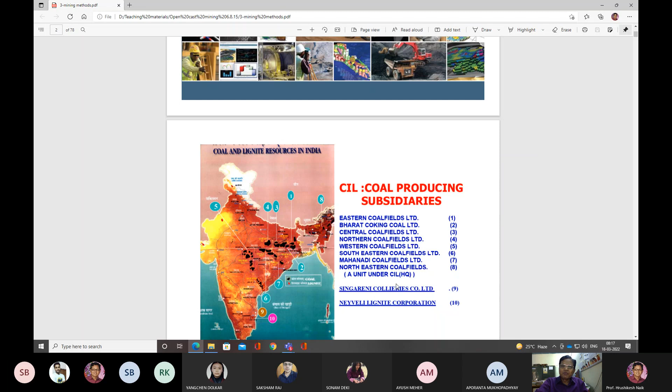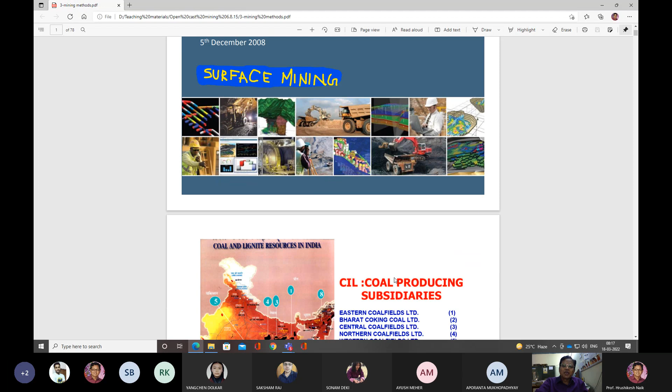In our country, the coal is mined by Coal India. Coal India is the company which is mining coal in India.

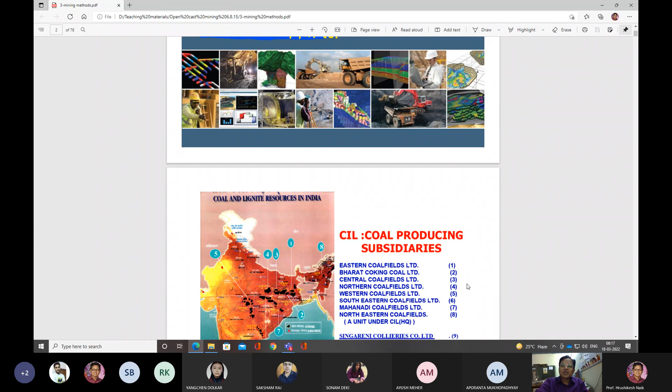The coal producing subsidiaries under Coal India include Eastern Coalfields Limited, Bharat Coking Coal Limited, Central Coalfields Limited, Northern Coalfields Limited, Western Coalfields Limited, South Eastern Coalfields Limited, Mahanadi Coalfields Limited, and Northeastern Coalfields Limited. All these subsidiaries are producing coal in India.

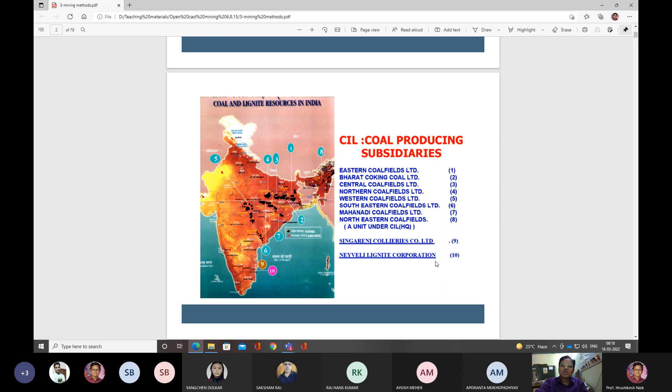Besides that, the Singareni Collieries Company Limited is also producing coal in India, and Neyveli Lignite Corporation is carrying out lignite mining in India.

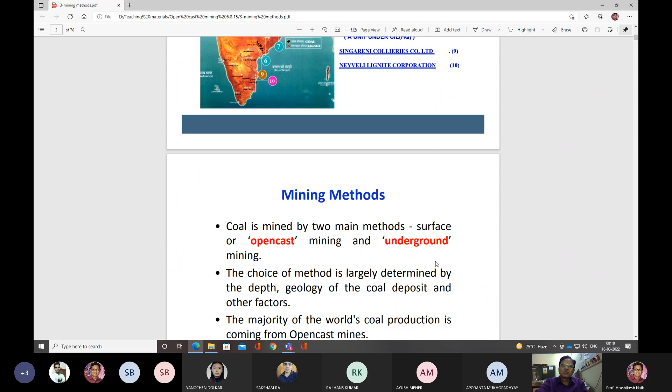The mining methods which are followed are open cast mining method and underground mining method. Coal is mined by these two main methods: surface mining or open cast mining, and underground coal mining. The choice of mining method is largely determined by the depth, geology of the coal deposit, and other factors.

The majority of the world's coal production is coming from open cast mines. This scenario is the same in India also.

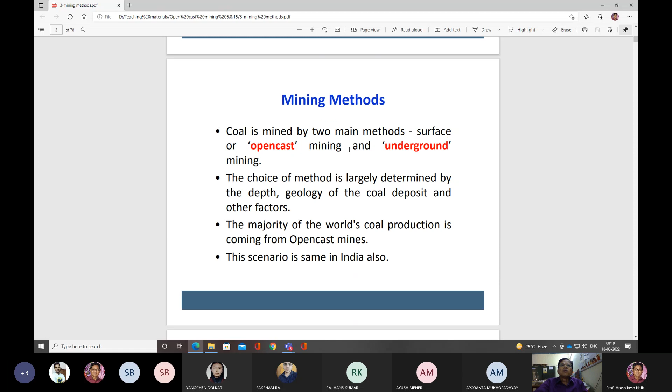We have discussed about the open cast mining methods, the different unit operations carried out in surface mines. The mining process in open cast mines is: first drill the holes, then blast the holes, then load the material, then haul the material, then transport it, and finally the mineral is processed, coal is washed.

Drilling is carried out by drill machines. There are two types of drill machines: rotary drilling and percussive drilling, and you can also go for a combination rotary-percussive drilling method.

Similarly, blasting is carried out using different types of explosives, like site mixed slurry explosives, emulsion explosives, primers, and non-electric detonators, all used for the blasting purpose.

After the material is blasted and fragmented, loading machines like shovels and draglines are used for loading the blasted material, and short distance hauling is done by front end loaders.

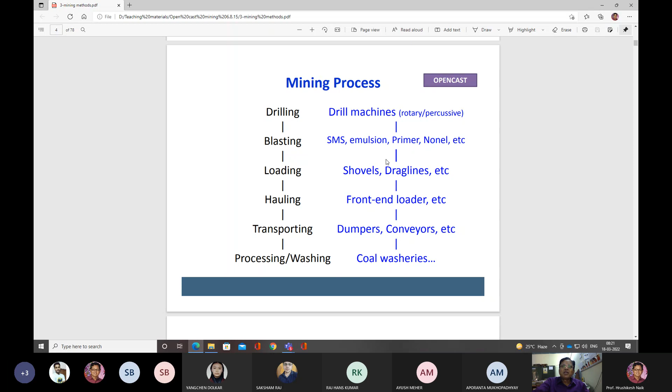Transportation of the material is carried out by dumpers and conveyors. After the material is transported, if it is waste material, it goes to the waste dump area. If it is coal, the material goes to the coal washeries for washing.

So the mining process we have discussed.

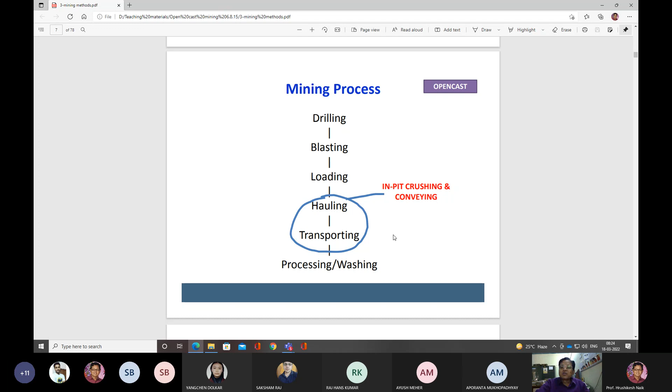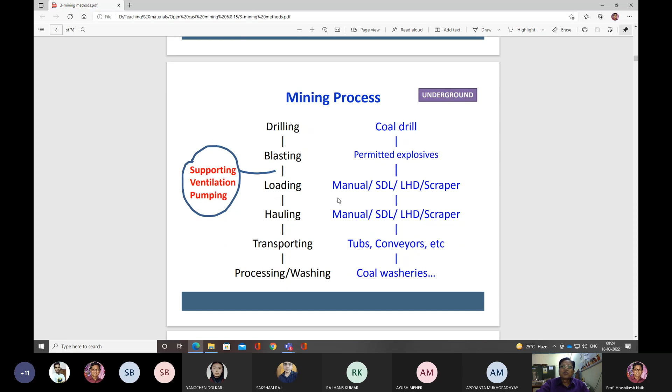For underground mining, these are the processes carried out, which is not our subject matter. So these are all underground mining processes, which we are not going to discuss.

In surface mines, selection of mining equipment is decided by the stripping ratio, the life of the mine, infrastructure available, proposed annual output, and technology available.

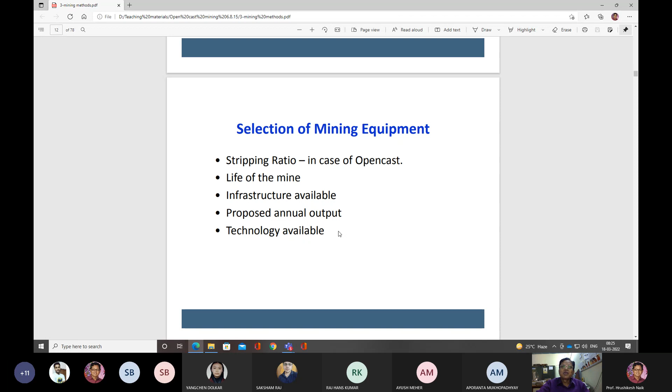In surface mining, the heavy earth moving equipments and machineries are selected based on the stripping ratio, life of the mine, infrastructure available, proposed annual output from the mine, and what type of technology is available in the market. Based on that, you have to select the mining equipment.

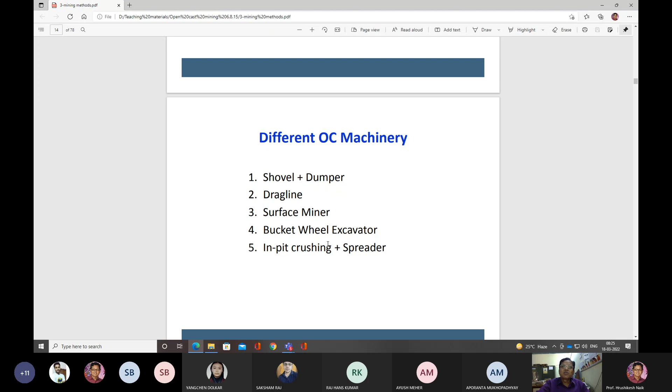The open cast mining machineries are shovel-dumper combination, dragline mining which we have discussed, surface miner which we have discussed, bucket wheel excavator which we have discussed, and in-pit crushing and spreader technology also which we have discussed.

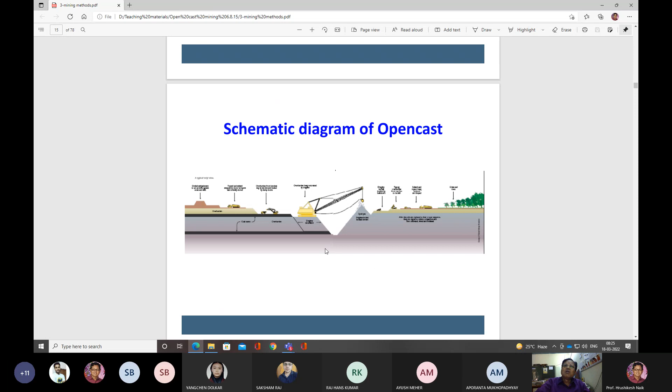This is the schematic diagram of open cast mining, showing how mining and reclamation are carried out simultaneously.

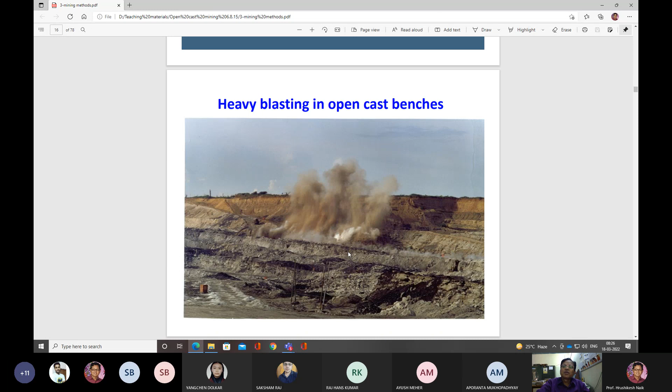This is a scenario of heavy blasting in open cast benches. Heavy blasting is carried out in open cast benches.

The shovel-dumper mining can be used for multi-seam extraction. It is a very flexible method of mining and can work in steep gradients up to 1 in 5.

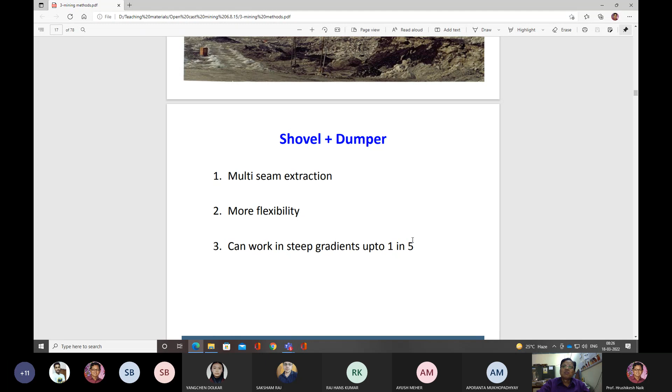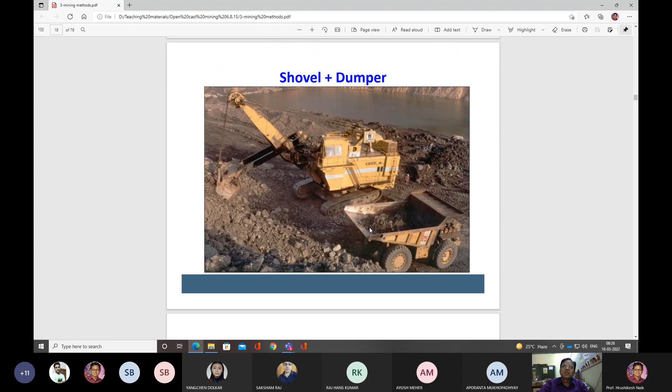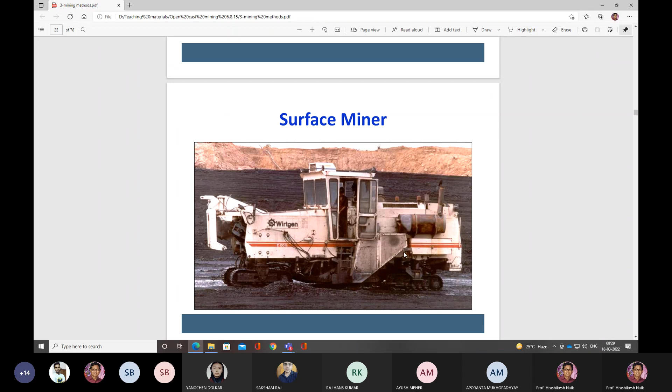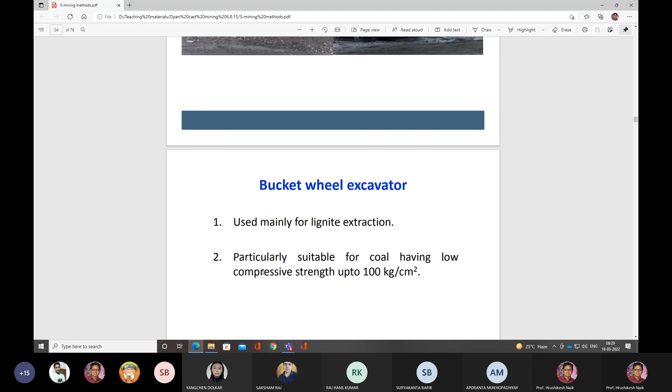For lignite extraction, the bucket wheel excavator is used. We have discussed the bucket wheel excavator in previous classes, which is used mainly for lignite extraction. This is the layout of the machine which is called the bucket wheel.

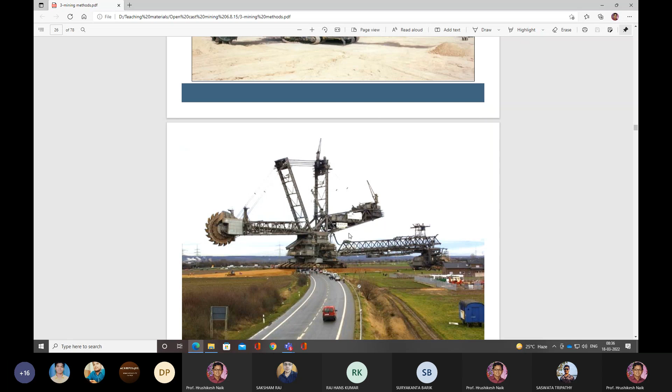So this is the bucket wheel excavator, and the wheel is very big. It has got these buckets - 1, 2, 3, up to 14 - so there are a number of buckets attached to the wheel. Whenever the wheel rotates anti-clockwise, the material is scooped and loaded onto the belt conveyor. This machine is called the bucket wheel excavator.

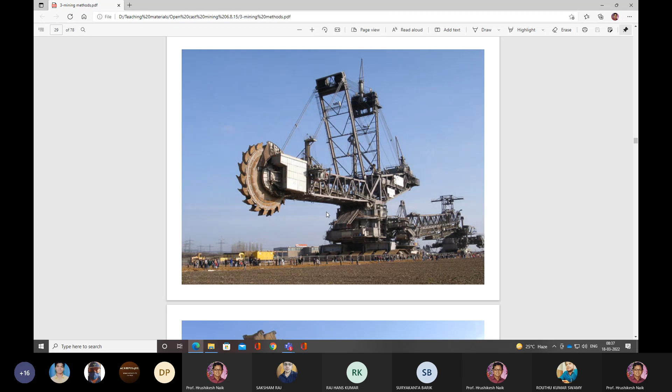So this is the diagram of the bucket wheel excavator. These are the buckets attached to the wheel, and this is the configuration of the bucket wheel excavator.

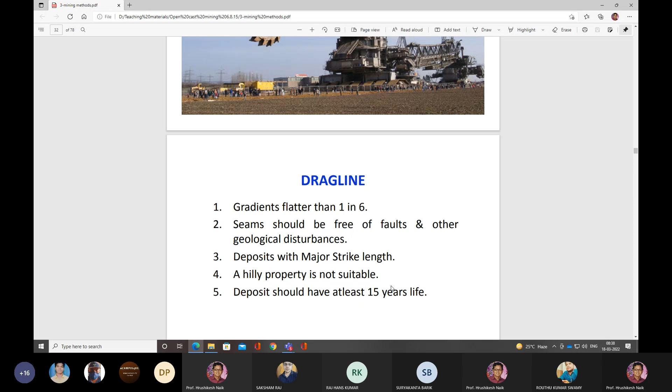Similarly, we have discussed dragline mining. Draglines can be used with gradients flatter than 1 in 6. Coal seams should be free from geological faults and other disturbances. The deposit should have major strike length, and a hilly property is not suitable for dragline mining. The mineral deposit should have at least 15 years of life, then only you can use the dragline machine.

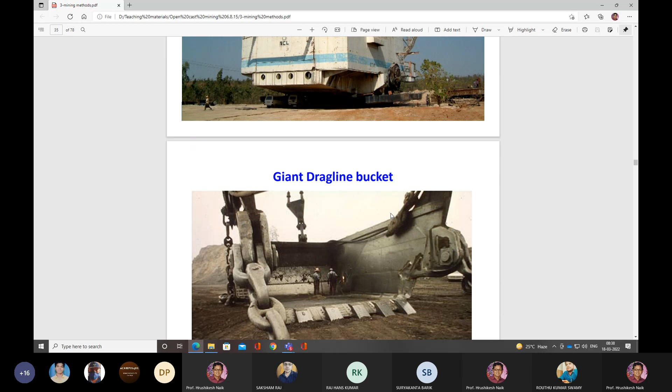So this is the configuration schematic diagram of the dragline machine. This is the bucket, and this is the dragline machine - the giant dragline bucket through which the material is lifted. This is a very big dragline bucket. We have also seen the in-pit crushing and conveying technology used in Neyveli Lignite Corporation.

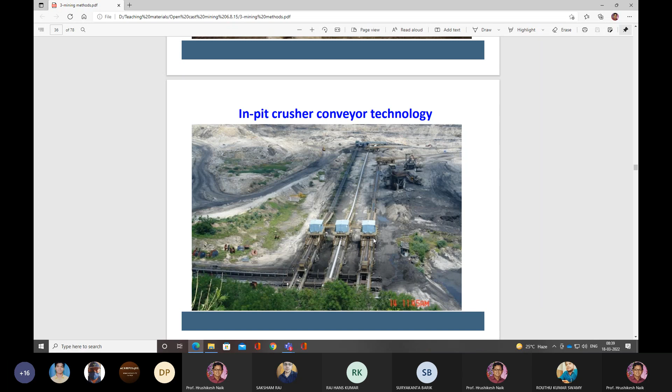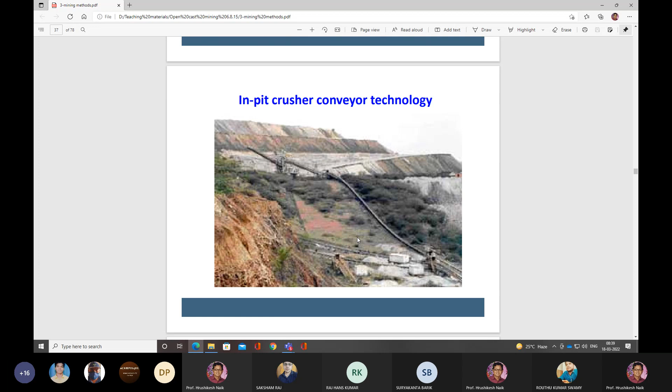So these are the crushers - one, two, three in-pit crushers are there. After the crushing of material is done, it is transported with the help of belt conveyors. This is how the in-pit crushing and conveying technology can be applied in mines.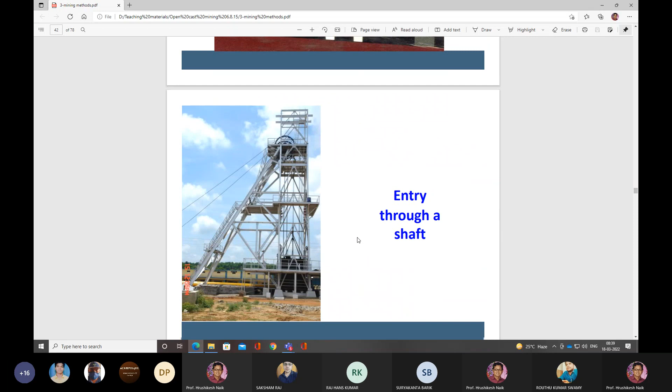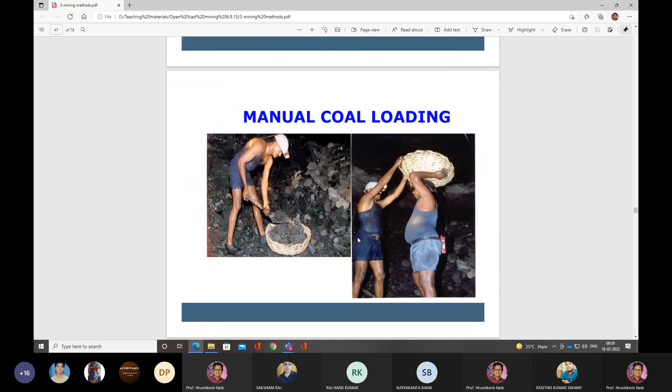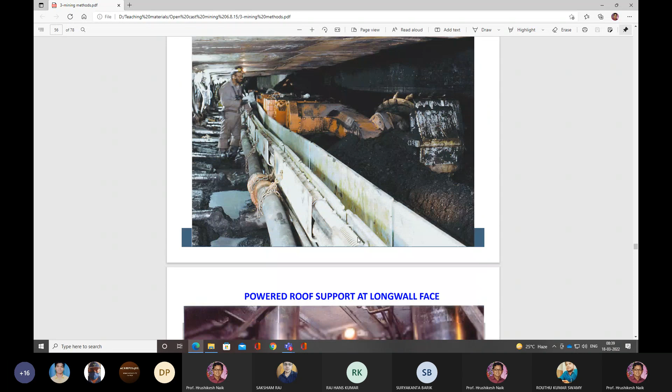This underground mining method I am not going to discuss, since this is a subject area you are already studying with another teacher. These are some features of underground mining which you can go through for your knowledge. Since this does not come under surface mining method, you can skip it and read it yourself.

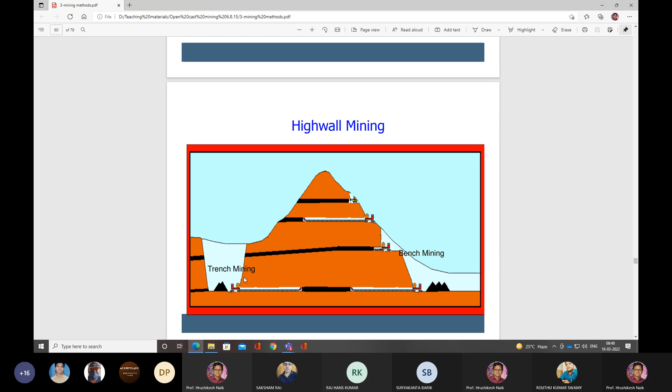Yesterday we discussed new concepts and new technologies in surface mining methods which are going to be implemented in India. Highwall mining is one method where you need not remove the overburden - you take out the coal by trench mining method. This is the high wall, these are the pillars you have left, and these are the boards from which the coal is taken out. It is called high wall mining because the wall is very high above the coal seam.

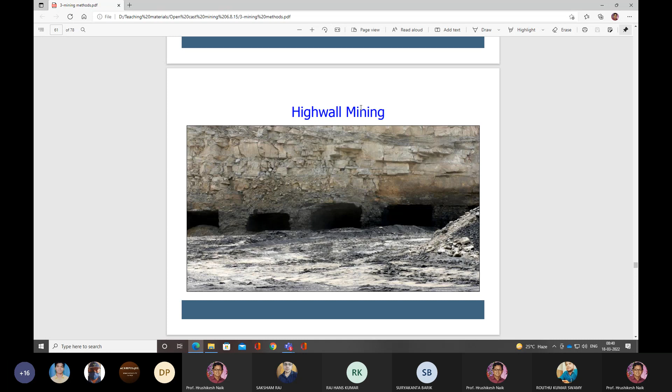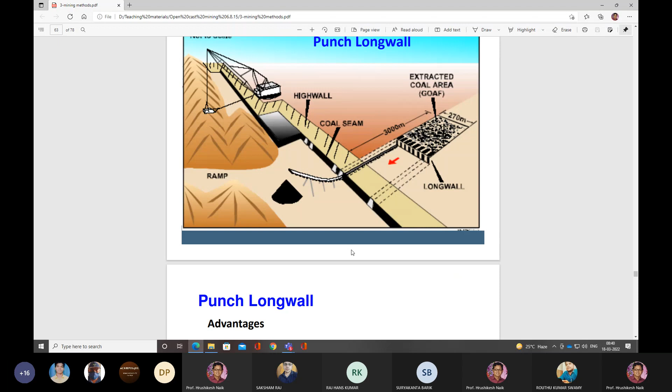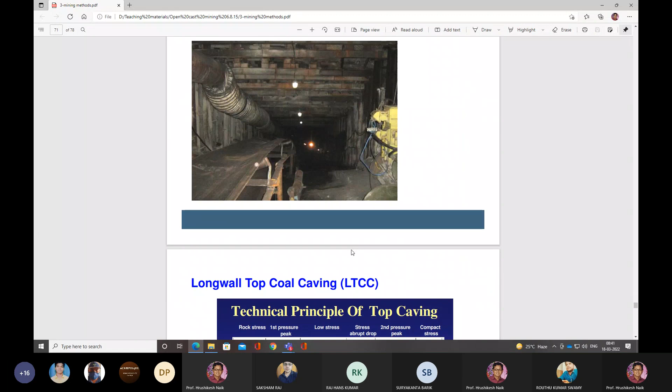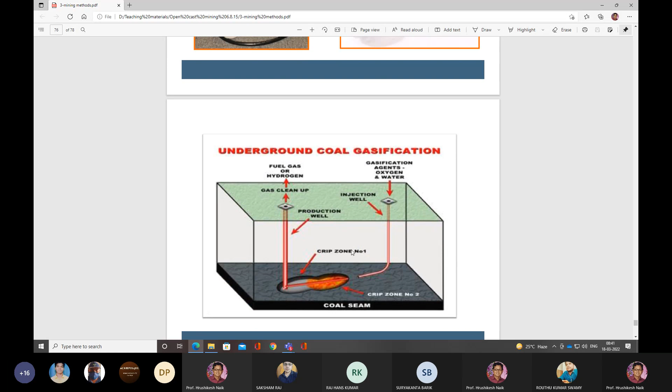The height of the overburden is very high, that's why it is called high wall mining. This is a machine called the high wall miner, and there are other things like punch long wall, etc. These are all for underground mining methods. Underground coal gasification is also one subject, and that's all about this.

Next is mining machinery in open cast mines - what are the different types of mining machinery used in open cast mines. Selection of mining equipment in open cast mines, selection and sizing of mining machinery, heavy earth moving machinery with special reference to large open cast iron ore mines.

We have discussed a lot about coal mining methods in India. Similarly, a huge amount of iron ore reserve is there in India. India ranks fifth in terms of iron ore reserves of the world. I told you coal occupies the third position in India, next to China and the United States of America. Similarly, the iron ore deposit in India ranks fifth in terms of world reserves.

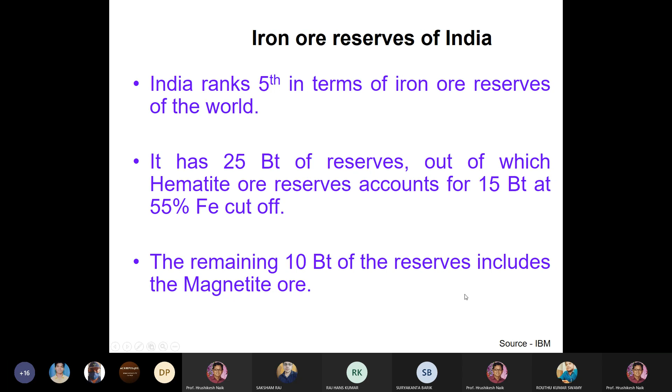It has 25 billion tons of reserves in India, out of which hematite ore reserves account for 15 billion tons at 55% iron cutoff. The remaining 10 billion tons of reserves includes magnetite ore and other hematite ore.

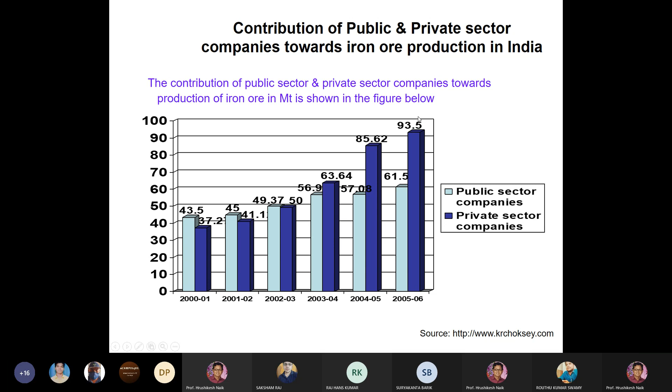This is the contribution of public and private sector companies towards iron ore production in India. Regarding the iron ore consumption pattern, out of 155 million tons of iron ore produced in India, 52 million tons has been consumed by domestic steel manufacturers and steel plants, 89 million tons is exported to other countries, and the remaining 14 million tons is left over in India. We are having a huge amount of iron ore deposit in India.

After using the iron ore for steel manufacture, we are exporting the iron ore to other countries also. After exporting, about 14 million ton is still left over in India.

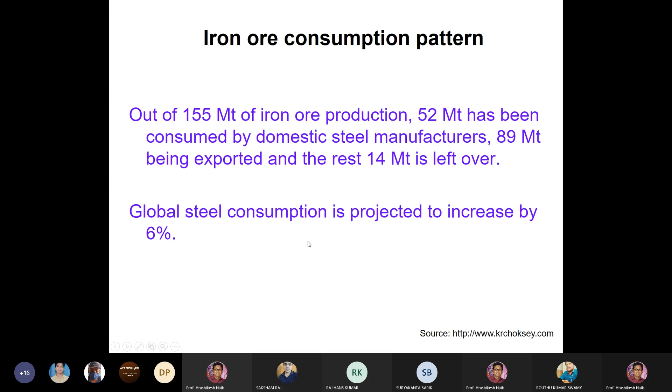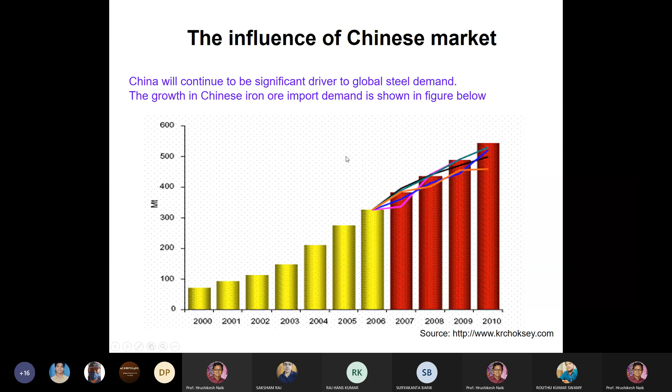The global steel consumption is projected to increase by 6%. This is the influence of the Chinese market. China will continue to be a significant driver of global steel demand. The growth in Chinese iron ore import demand is shown in this figure. So the cutting edge is the increasing demand of iron ore vis-a-vis the levy on the export market.

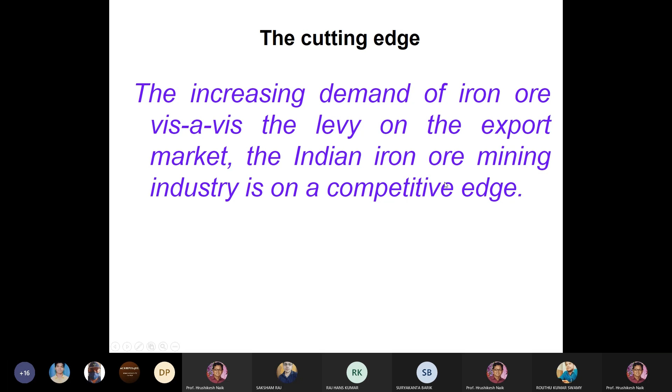The Indian iron ore mining industry is on a competitive edge. The cost of mining, generally 90% of the variable cost of mining, comprises the operation of the mine and maintenance cost of mining equipment, whereas the rest is attributable to blasting.

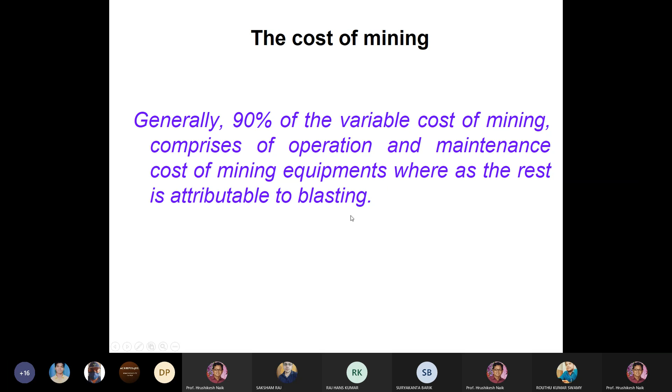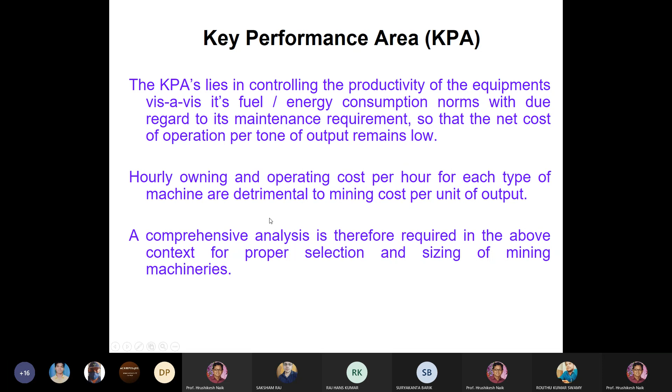The key performance area in iron ore mining lies in controlling the productivity of the equipment vis-a-vis its fuel energy consumption norms, with due regard to its maintenance requirement, so that the net cost of operation per ton of output remains low. Hourly owning and operating cost per hour for each type of machine are detrimental to mining cost per unit of output. A comprehensive analysis is therefore required for proper selection and sizing of mining machineries. Equipment selection methodology.

Computation of owning cost. Basic price of the equipment is the price of equipment at its place of manufacture. Then after that you have to add duties, taxes and freight. This includes the excise duty, sales tax, customs duty for imported machines, along with freight expenses to bring the equipment to your mining site.

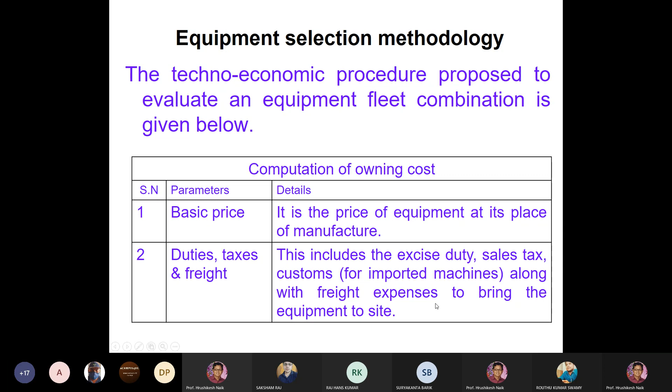The equipment selection methodology also takes into account the depreciation value. This reflects the difference between the landed price and salvage price of the equipment. In India, generally 10% of the basic price of equipment is considered as the salvage value.

Then what is the average investment? Average investment is equal to basic price of the equipment into life of the equipment in years less 1, plus salvage value of the equipment into life of the equipment in years less 1, divided by 2, into life of the equipment in hours. This is the way you can calculate the average investment.

Then you have to pay interest. If you are taking a loan from the bank, you have to account for the interest. Also you have to go for insurance and taxes per hour. Generally it is to the tune of 16% of the average investment figure.

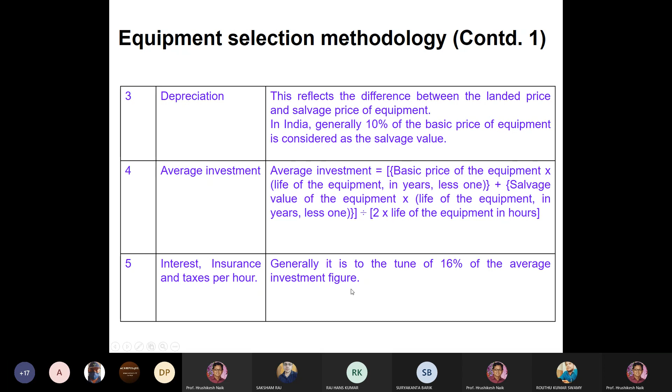Then you have to calculate the depreciation cost per hour. This is deduced by dividing the depreciation figure by the life of equipment in hours. Then after that you will calculate the total owning cost of the equipment, which is the sum total of points 5 and 6.

Then you have to go for operating cost calculation, like your fuel cost. This reflects the cost of fuel, which can be either high speed diesel for diesel prime movers, or the cost of electricity commensurate to the motor load for electrically driven equipment.

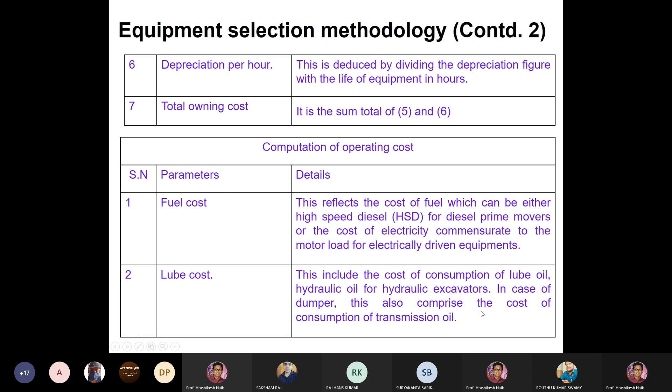Then you have to also calculate the lube cost. This includes the cost of consumption of lube oil, hydraulic oil for hydraulic excavators. In case of dumpers, this also comprises the cost of consumption of transmission oil.

Then labor cost. To operate the machines, you have to engage laborers. So this includes the wages of operators computed down to a per hour basis.

Then whenever the machines are operated in the mines, you have to account for repairs and maintenance if any breakdown occurs. This is the most important driver of cost in open cast mines. Generally, it varies from 40% to as high as 60% of the hourly depreciation figures. However, it is better if an existing life cycle cost figure exists for a particular equipment.

Then the dumpers or tire mounted equipments also consume the tire cost. This includes the cost of tires and is applicable only to tire mounted mining equipments. Total operating cost is equal to the sum total of items 1, 2, 3, 4 and 5.

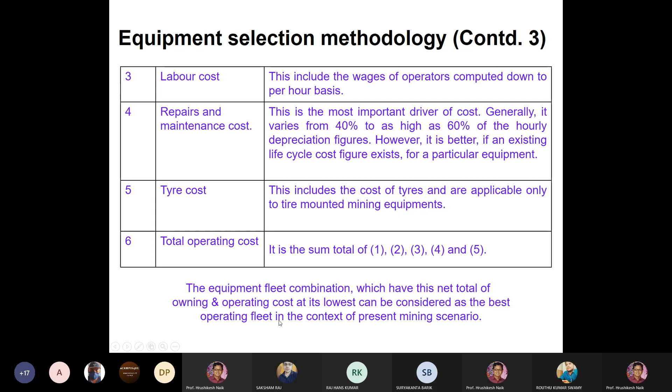The equipment fleet combination which has the net total of owning and operating cost at its lowest can be considered as the best operating fleet in the context of present mining scenario. So there are certain constraints that are going to affect your selected technology.

The best selected combination of heavy earth moving machinery needs to be pursued with the following constraints: bench height of the mine commensurate to its quality, working width of the bench keeping into consideration the width of the ore body and topography of the area, available infrastructure for maintenance of the equipment within the company or the need to revamp the same, and adequacy of in-house trained skilled manpower, including workmen and supervisors, for such specialized services.

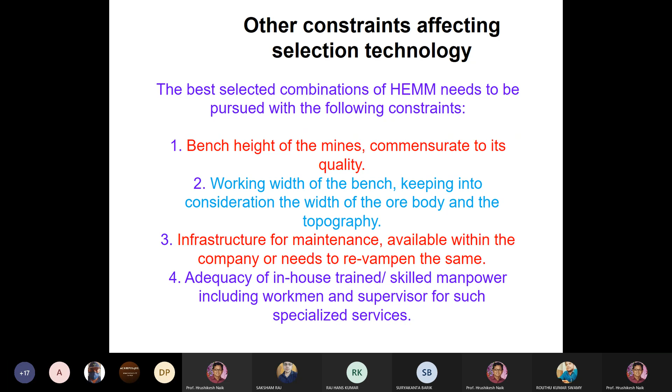It is recommended that proper techno-economic analysis for different fleet combinations be assessed prior to procurement and deployment at mine sites. The assumptions made in the above analysis shall be substantiated with data on fuel consumption trends, repairs and maintenance cost, tire cost, etc., as established under actual field conditions.

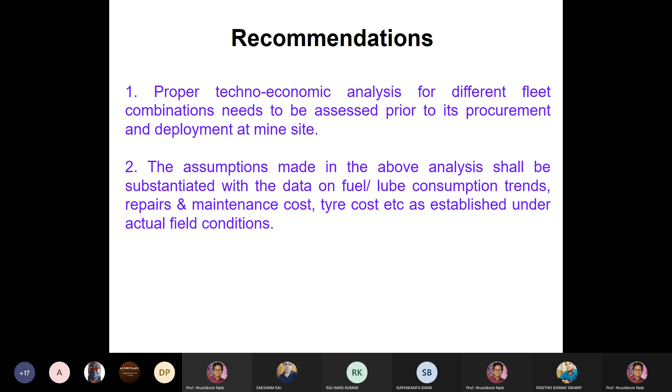Some proposed and executed projects in this line by MECON are the Rowghat iron ore mine, planned for 14 million tons per year, using 10 by 8 cubic meter power shovels and hydraulic excavators, with dumper capacity of 120 tons.

Then the Chiria iron ore mine, producing 7 million tons per year, using 5.5 cubic meter hydraulic excavators and 85 ton dumpers.

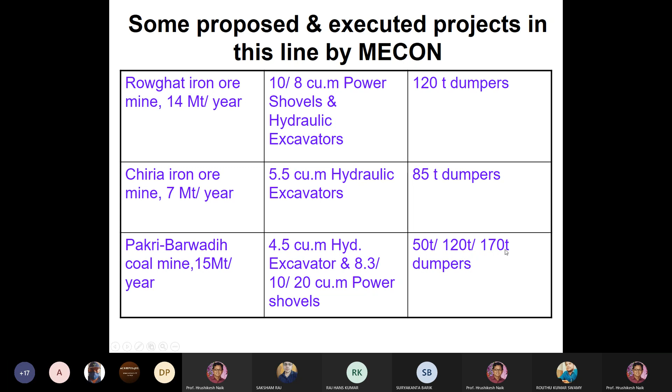Then Pakri-Barwadih coal mine is planned for 15 million tons per year capacity, using 4.5 cubic meter hydraulic excavators and 8.3, 10, 20 cubic meter power shovels, with dumpers of 50 ton, 120 ton, and 170 ton capacity.

They are using 10 by 10, 23 cubic meter rope shovels, 34 cubic meter hydraulic shovels, and dumper capacity of 85 ton, 135 ton, 137 ton.

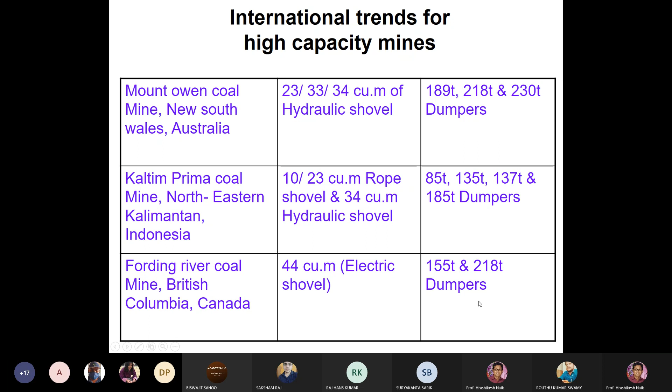And 185 ton dumpers. Fording River coal mine, British Columbia, Canada, uses 44 cubic meter electric shovels, and dumper capacity of 155 ton and 218 ton.

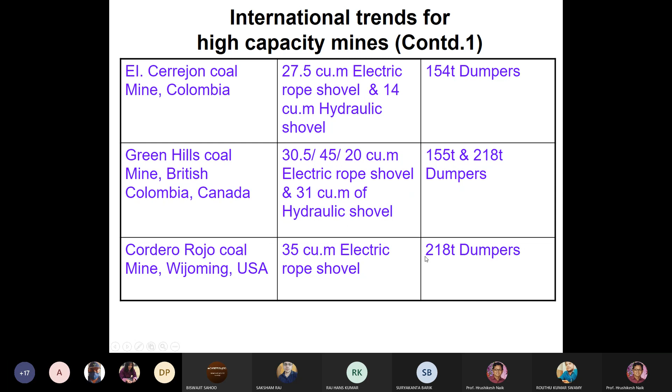Cordero Rojo coal mine, Wyoming, USA, uses 35 cubic meter electric rope shovels in combination with 218 ton dumpers. So this is all about today's class.

Today we have discussed an overview of surface mining methods and surface mining technology used in India for extraction of coal deposits and iron ore deposits. There are very big machines used in surface mines for producing more mineral.

India is the fifth largest producer of iron ore, and this iron ore is mined from hilltop deposits. This mineral, the iron ore, goes to the steel plants. The major consumer of iron ore is the steel plant for steel manufacture. And since we have enough iron ore deposits in India, whatever we mine after consumption in steel plants...

After consumption in steel plants, a considerable amount of iron ore is exported to other countries, and even after exporting, about 14 million tons of iron ore is still lying in the stockyards.